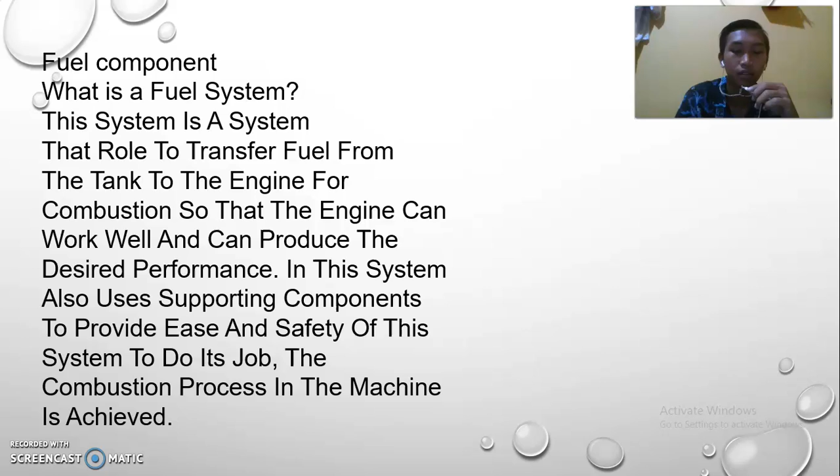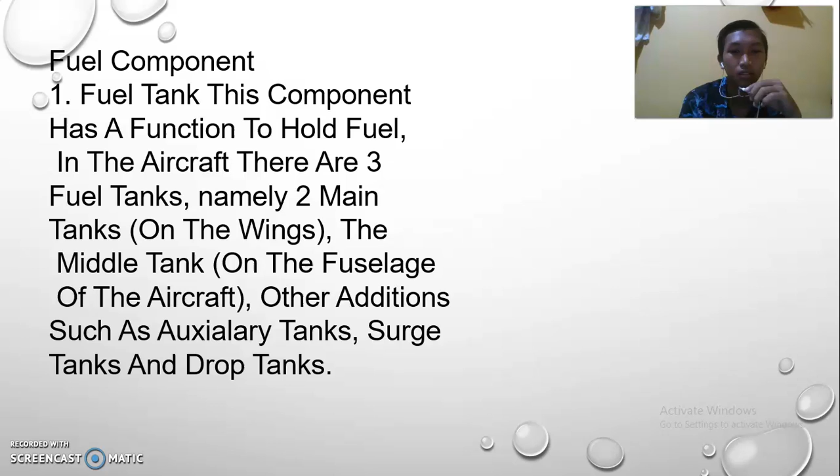Fuel component number one, fuel tank. This component has a function to hold fuel. In the aircraft, there are three fuel tanks, namely two main tanks on the wings, and the middle tank on the fuselage of the aircraft. Other additions include auxiliary tanks, surge tanks, and drop tanks.

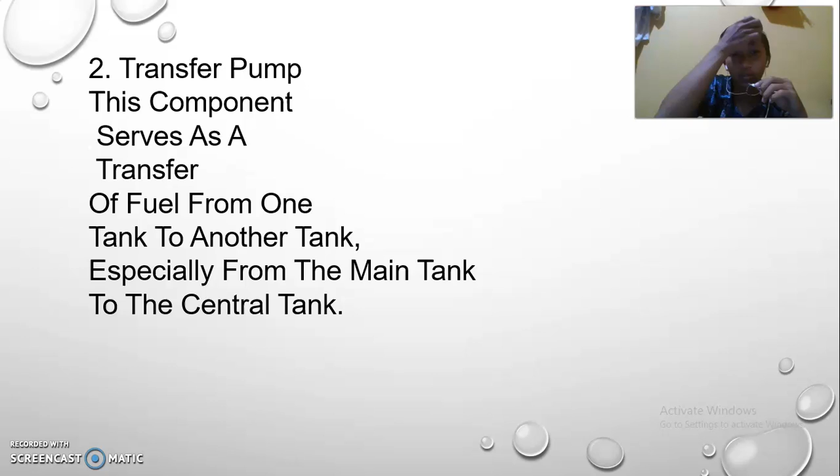Number two, transfer pump. This component serves to transfer fuel from one tank to another tank, especially from the main tank to the central tank.

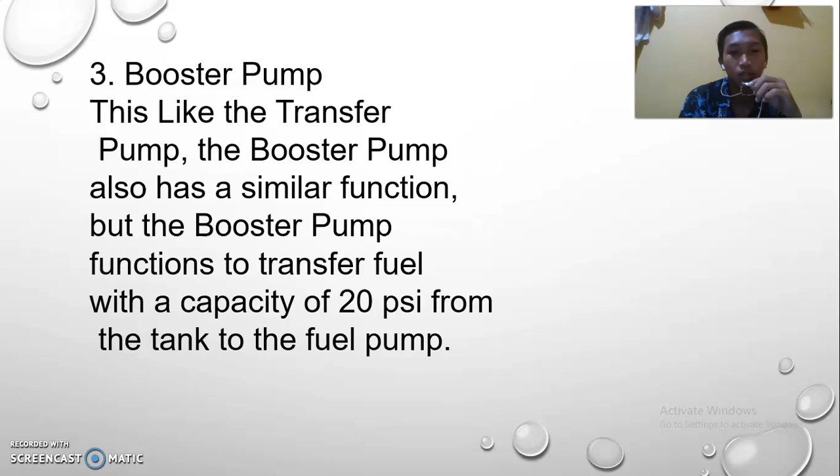Number three, booster pump. Like the transfer pump, the booster pump has a similar function, but the booster pump transfers fuel with a capacity of 20 psi from the tank to the fuel pump.

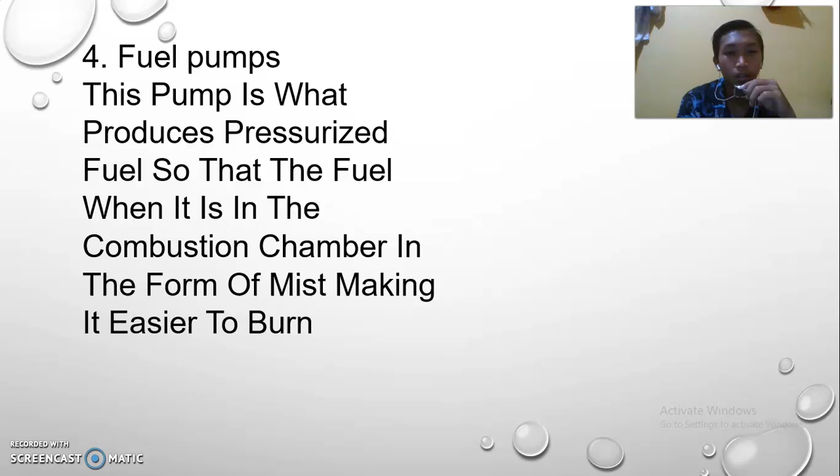Number four, fuel pumps. This pump produces pressurized fuel so that when it is in the combustion chamber, it is easier to burn.

Number five, fuel shut-off valve. This valve serves to disconnect and connect the flow of fuel that will enter the system.

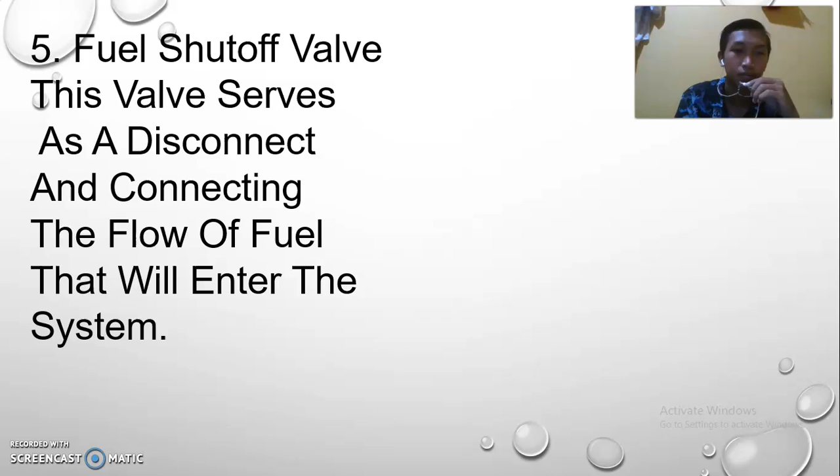Number six, cross valve. This valve serves as a fuel transfer if the amount of fuel quantity in a tank is not balanced, or if a tank has a system failure in fuel distribution, so it can be supplied from other tanks through the cross feed valve.

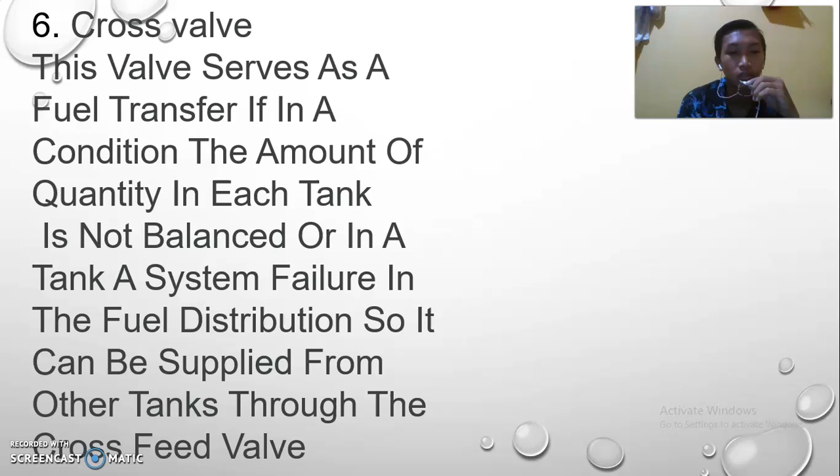Number seven, fuel control unit (FCU). This component has a function to control the amount of fuel that will enter the combustion chamber based on the amount of intake air.

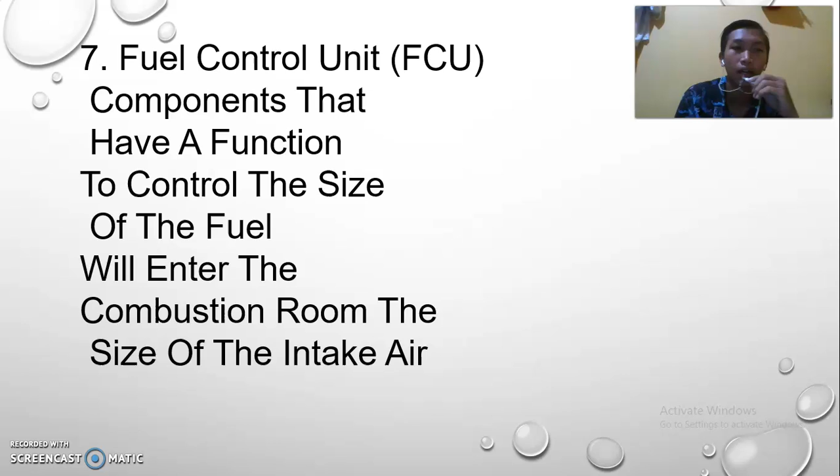Number eight, fuel nozzle. This part serves as the channel into the combustion chamber for misting the fuel.

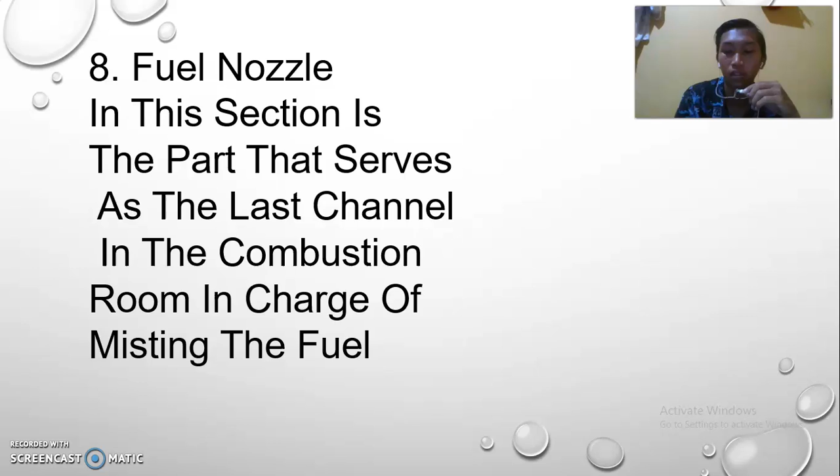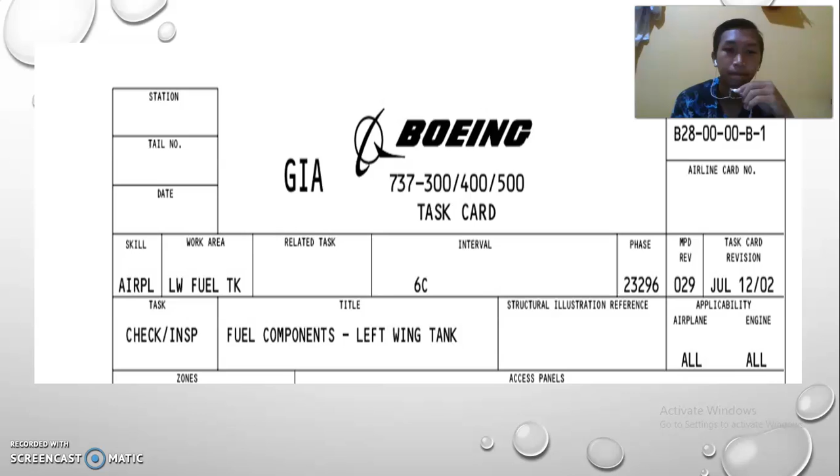Task card, Boeing 737-300, 400, and 500. Visually check the following left wing fuel tank components for condition and security of installation. Number one, internal fuel system plumbing and bonding jumpers.

Number two, fuel quantity tank and compensator units, MM 28-41-21. Number three, baffle check valves and sump drain valves.

MM 28-11-00. Number four, fuel boost pump removal valves, fuel boost pump intake strainer.

Number five, bypass check valves and vent valves, MM 28-22-00. Number six, surge tank and drain check valves, MM 28-13-00.

Fuel vent. Number seven, fuel vent float valves, MM 28-13-00. Fuel float switch conduit and bonding jumper. Number eight, hydraulic fluid heat exchanger, including rear spar line fittings, brackets and bonding jumper, MM 29-15-00.

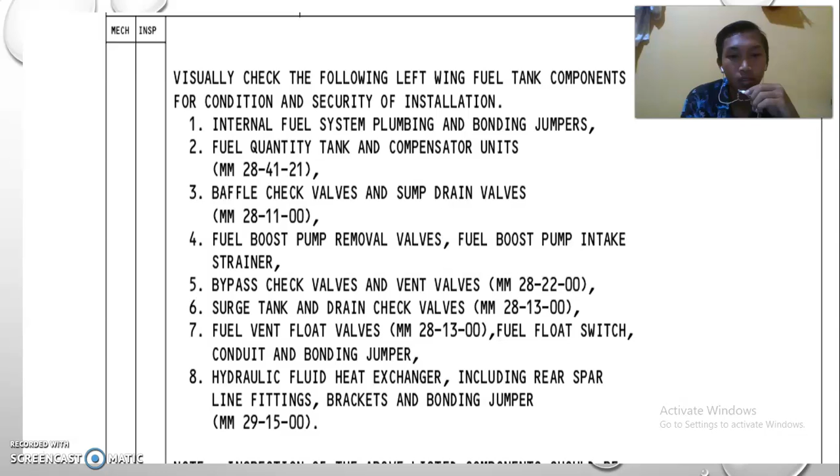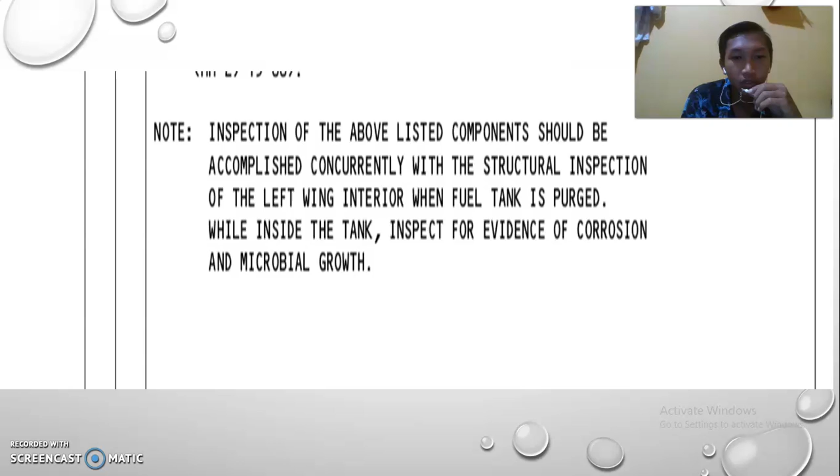Note: inspection of the above listed components should be accomplished concurrently with the structural inspection of the left wing interior when fuel tank is purged. While inside the tank, inspect for evidence of corrosion and microbial growth.

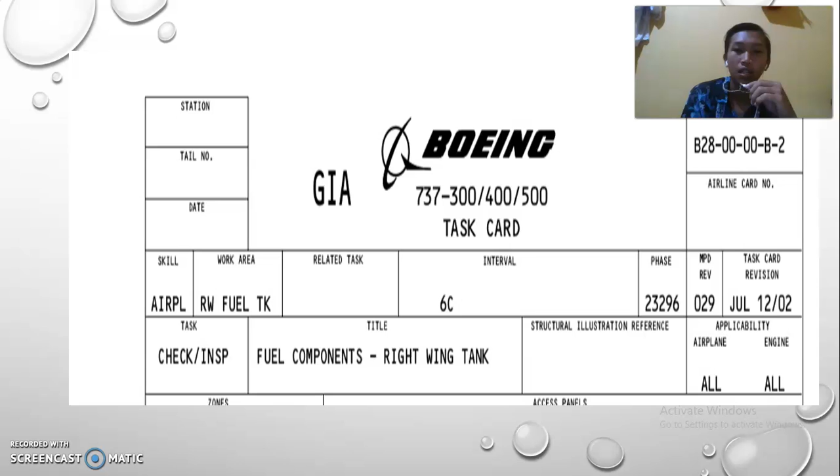Task card, Boeing 737-300, 400 and 500. Visually check the following right wing fuel tank components for condition and security of installation.

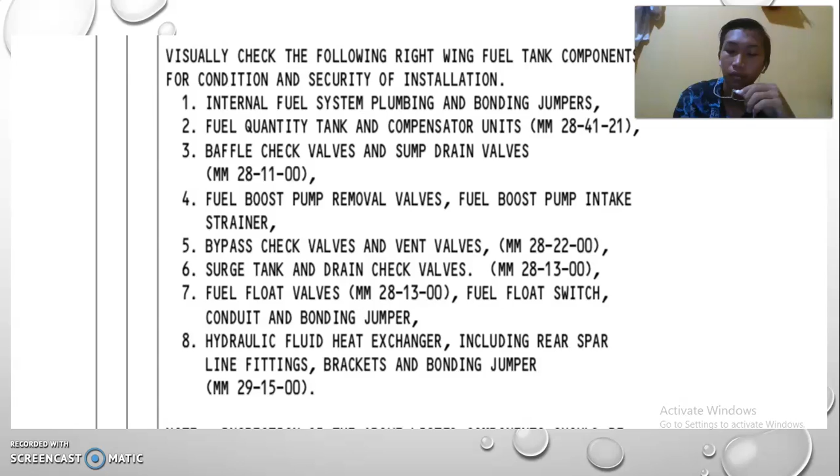Note: inspection of the above listed components should be accomplished concurrently with the structural inspection of the right wing interior when fuel tank is purged. While inside the tank, inspect for evidence of corrosion and microbial growth.

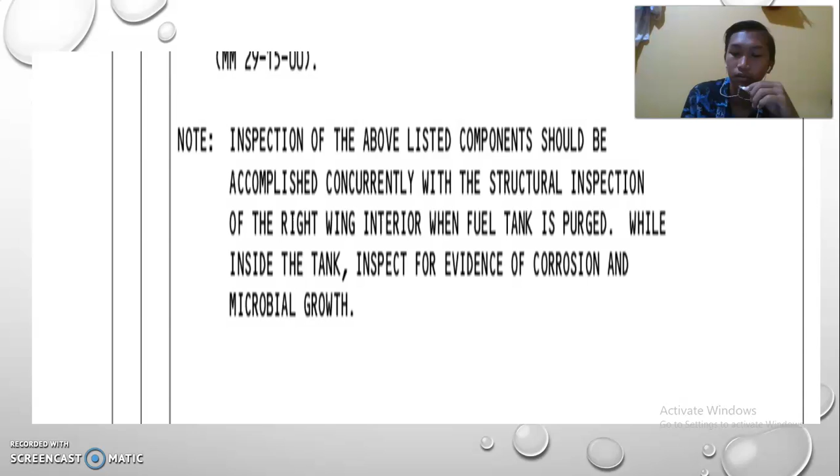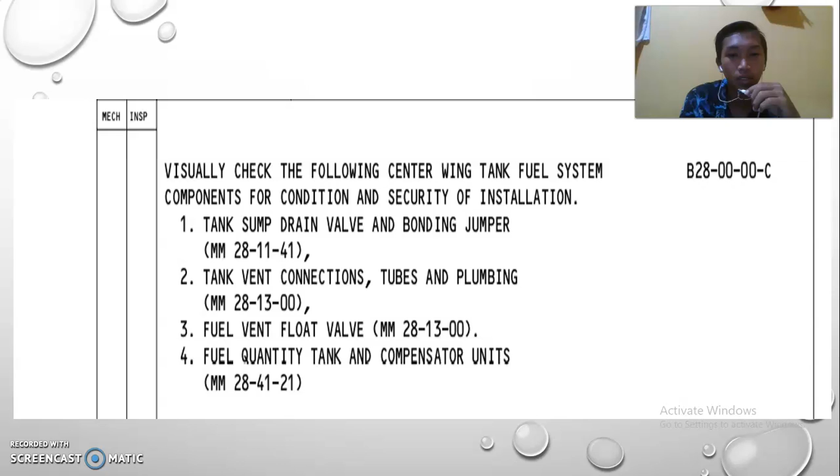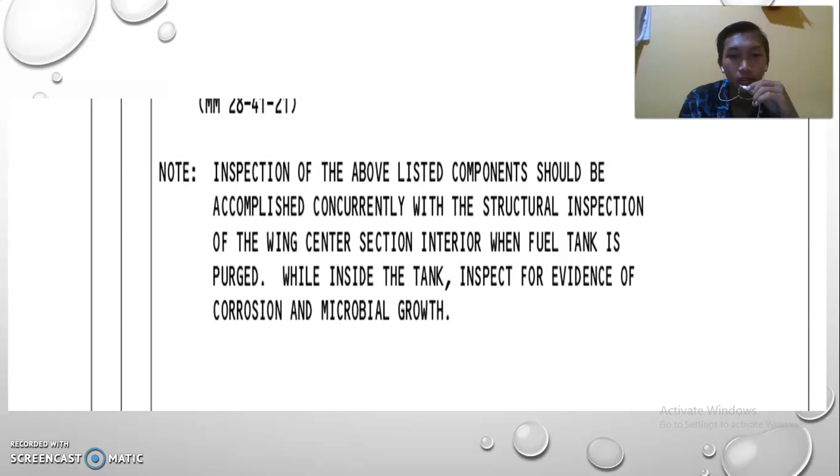Note: inspection of the above listed components should be accomplished concurrently with the structural inspection of the wing center section interior when fuel tank is purged. While inside the tank, inspect for evidence of corrosion and microbial growth. Okay, thank you, my friend.